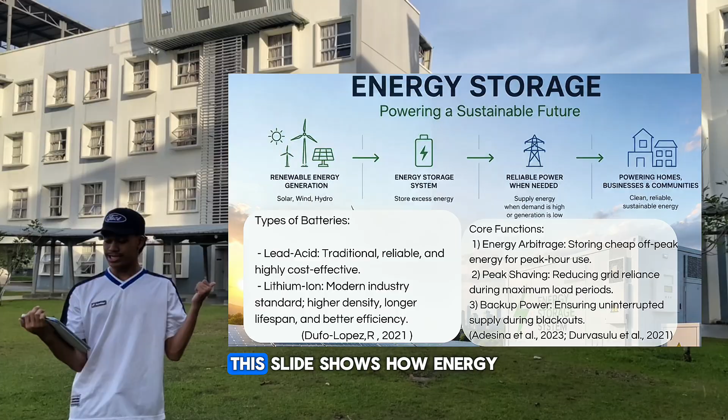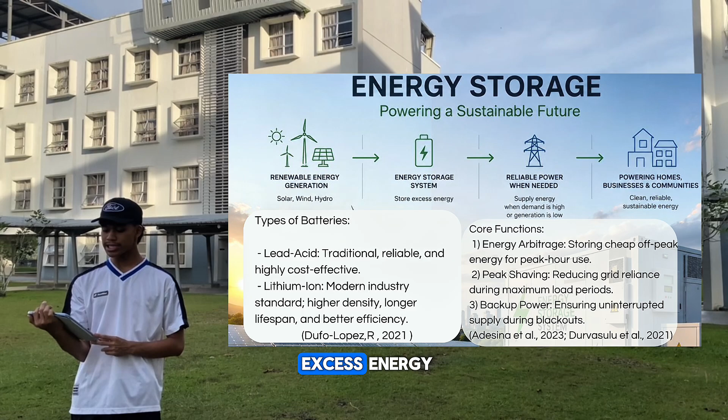Electricity is generated from renewable energy sources such as solar, wind, and hydropower. Since these energy sources depend on weather conditions, the amount of electricity produced can vary throughout the day. To solve this problem, an energy storage system is used to store excess energy when production is high. The stored energy can then be released when demand increases or when renewable energy generation is low. This ensures a reliable and continuous power supply for homes, businesses, and communities.

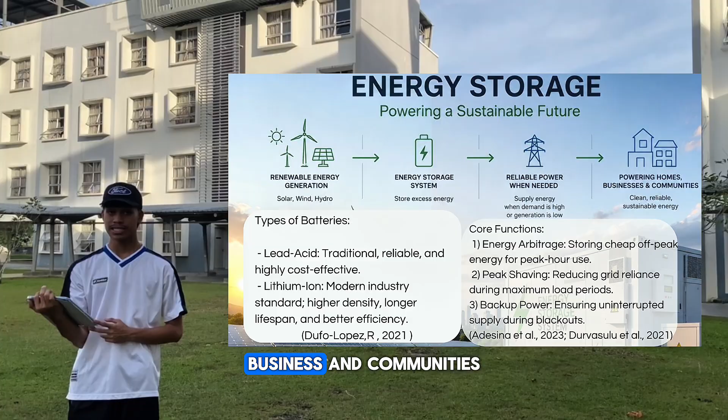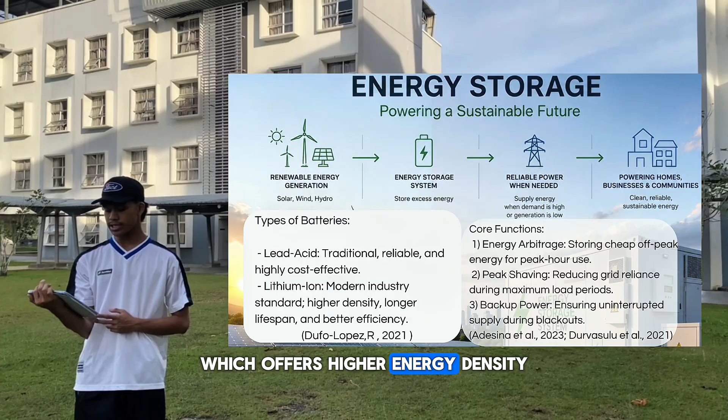There are two common types of batteries used in energy storage. The first is lead acid battery, which is reliable, widely used, and cost effective. The second is lithium ion battery, which offers higher energy density, better efficiency, and longer lifespan, making it the preferred choice in modern energy storage applications.

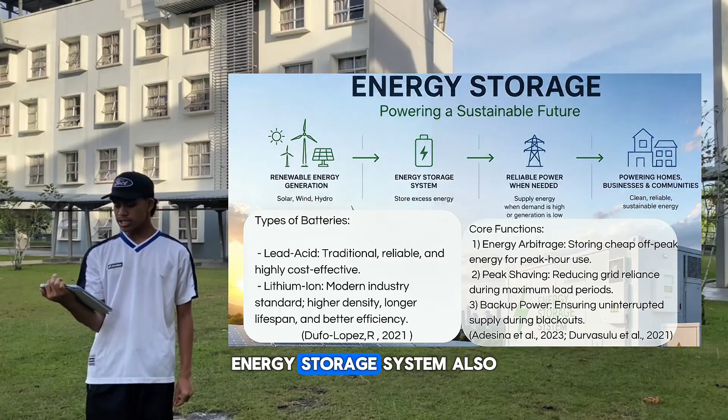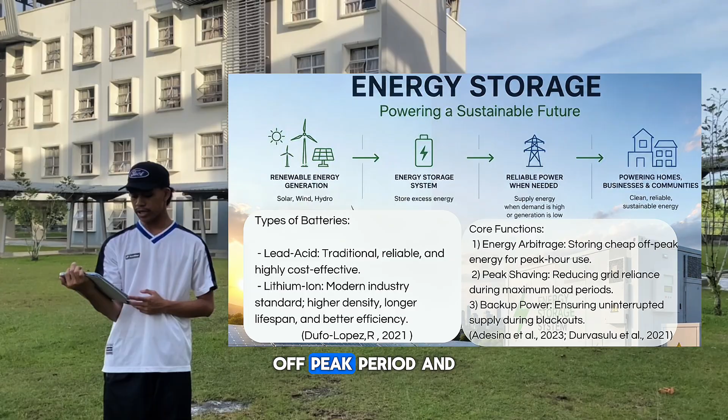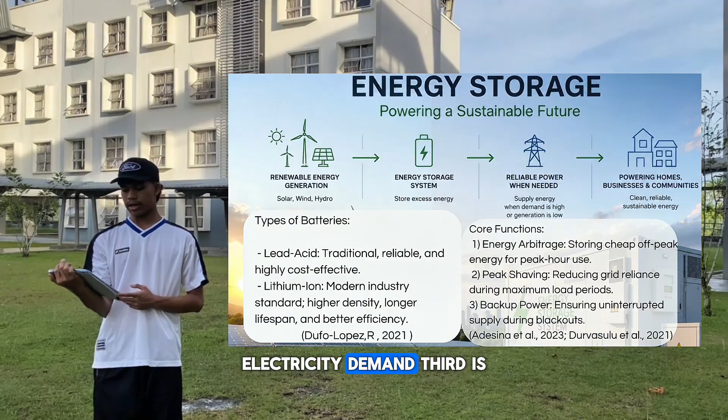Energy storage systems also have three main functions. The first is energy arbitrage, which involves storing energy during off-peak periods and using it during peak hours. Second is peak shaving, which reduces dependence on the power grid during periods of higher electricity demand. Third is backup power, which provides electricity during outages or blackouts.

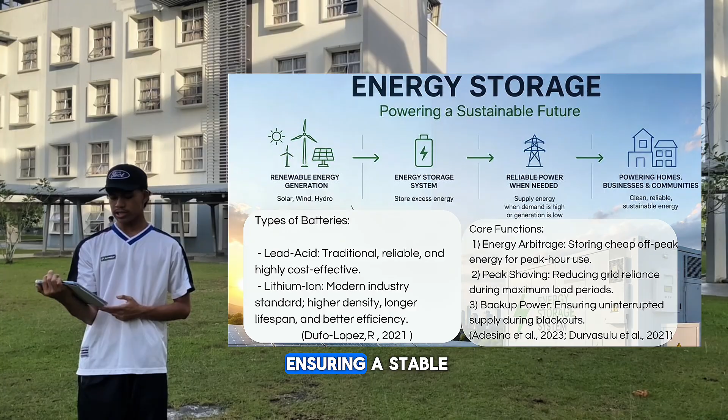Overall, energy storage systems play an important role in the reliability of renewable energy, reducing energy costs, and ensuring a stable and sustainable electricity supply for the future. So that's all from me.

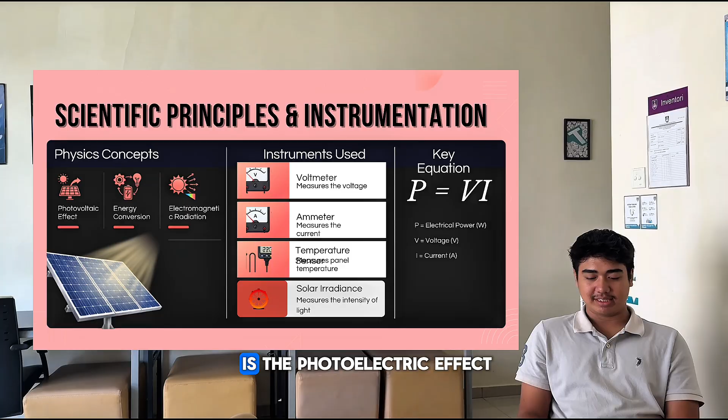Next, I will explain the scientific principles and instrumentation involved in the solar energy system. The first basic concept is the photovoltaic effect. Solar cells absorb sunlight and convert it directly into electrical energy.

When sunlight hits the solar panel, electrons gain energy and move, creating an electric current. The second concept is energy conversion, where solar energy is transformed into electrical energy that can be used to power electrical devices. The third concept is electromagnetic radiation: sunlight carries energy in the form of electromagnetic waves, and this energy is absorbed by the solar cells.

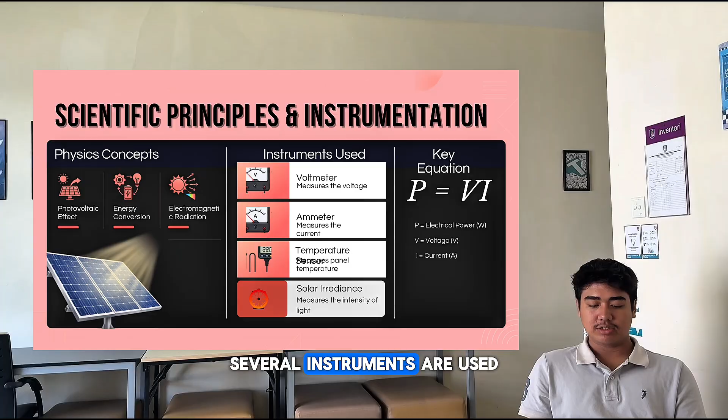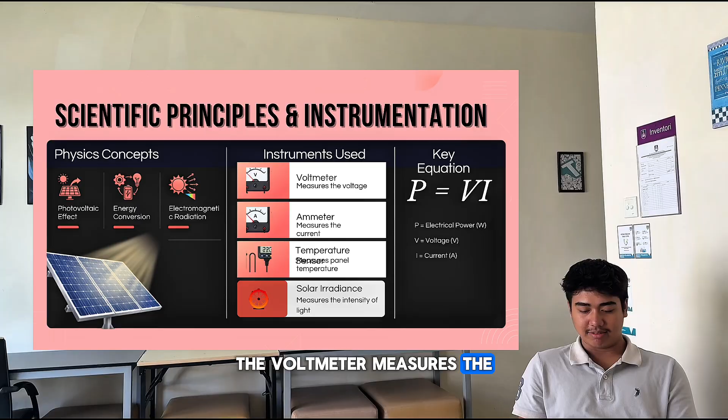Several instruments are used to monitor the system. A solar irradiance meter measures the intensity of sunlight. A voltmeter measures the voltage produced. An ammeter measures the current flowing in the circuit. And a temperature sensor measures the temperature of the solar panel.

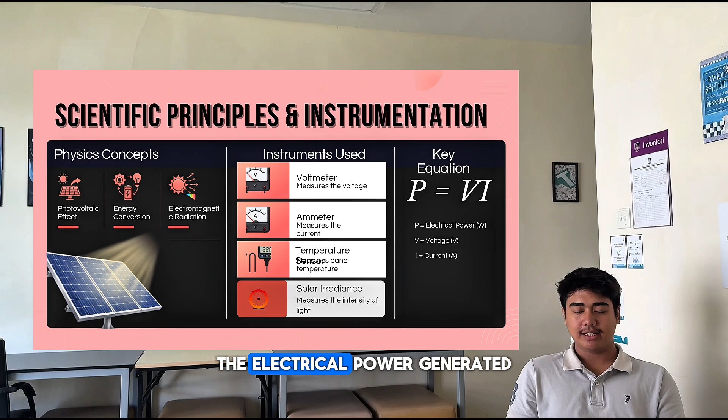The electrical power generated by the solar panel can be calculated using the equation P equals V times I, where P is power, V is voltage, and I is current.

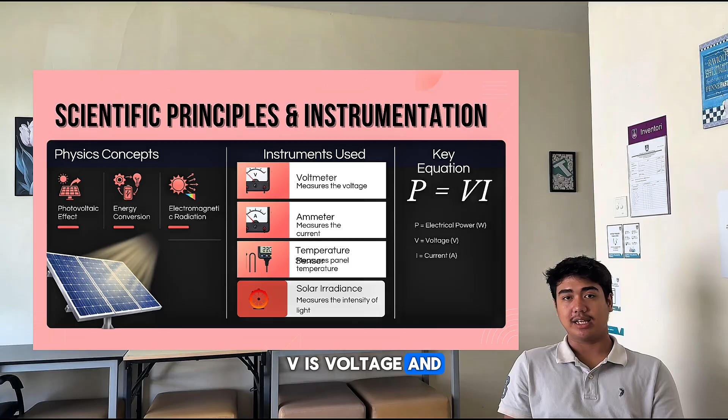Next, the solar energy system. This system consists of 5 main components, namely solar panel, battery charge controller, battery storage, inverter, and electrical load. The working principle begins when sunlight strikes the solar panel. Through the photovoltaic effect, the solar panel converts solar energy into electrical energy.

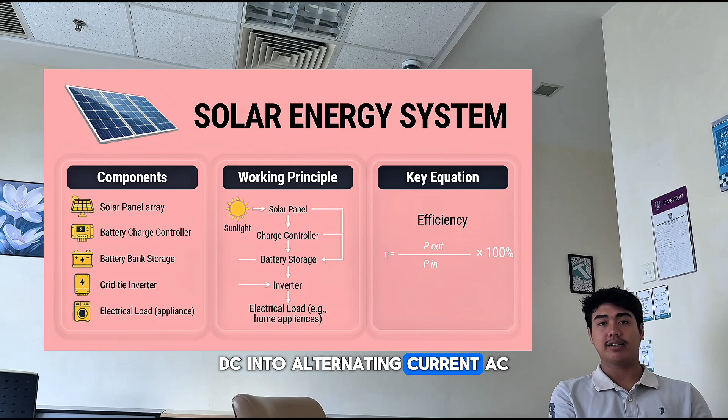The generated electricity then flows to the battery charge controller, which regulates the charging process and protects the battery from overcharging. Next, the electrical energy is stored in the battery for later use. The inverter then converts direct current (DC) into alternating current (AC), which can be used by electrical appliances, also known as the electrical load.

The efficiency of the solar panel can be determined using the equation shown on the slide, where eta represents efficiency, P out is the output power produced by the solar panel, and P in is the input power received from the sunlight.

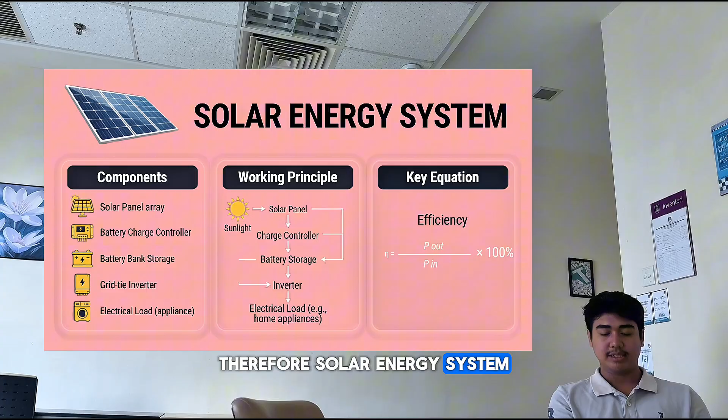A higher efficiency means the solar panel can convert more solar energy into useful electrical energy. Therefore, solar energy systems provide a clean, renewable, and sustainable source of electricity.

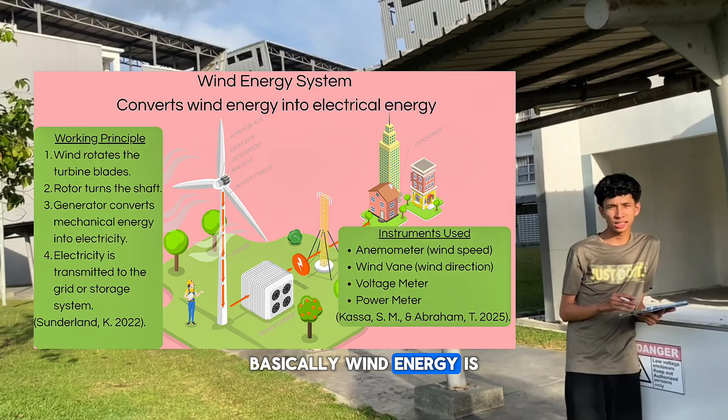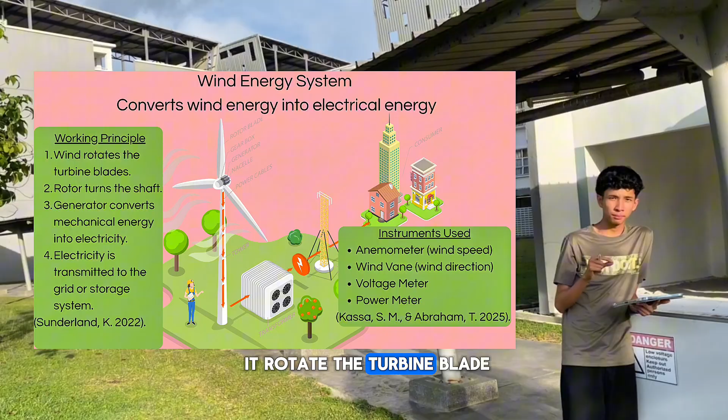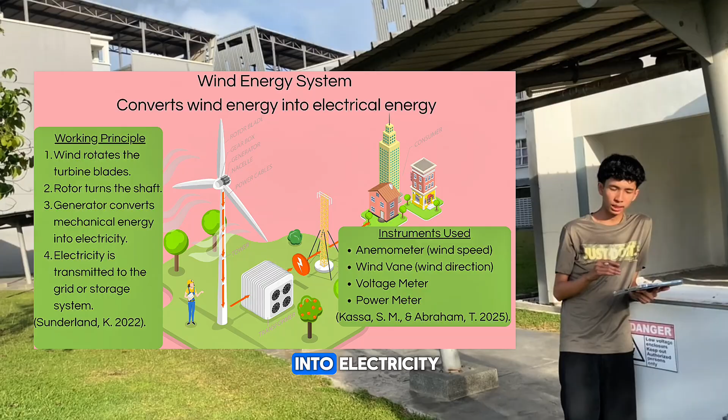Okay, now we'll talk about wind energy. Wind energy is a renewable source that converts the kinetic energy of moving air into electrical energy. When the wind blows, it rotates the turbine blades. The blades are connected to a rotor and shaft, which drive a generator. The generator then converts the mechanical energy into electricity through electromagnetic induction.

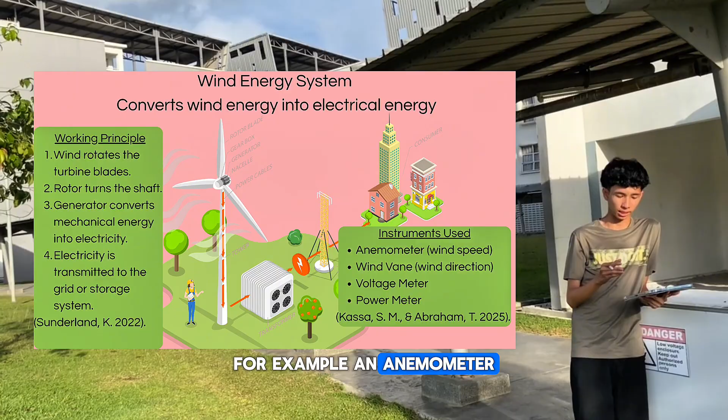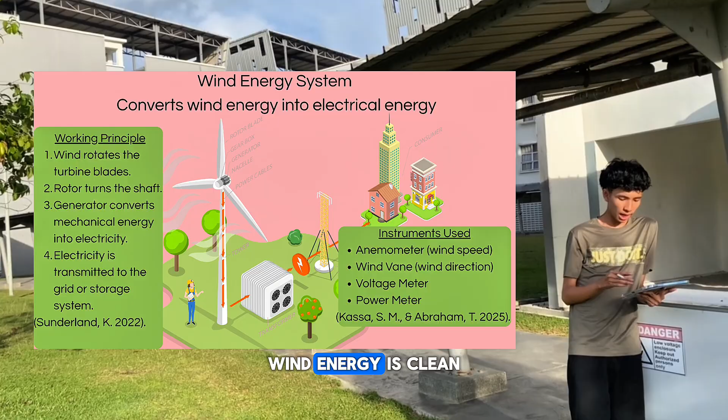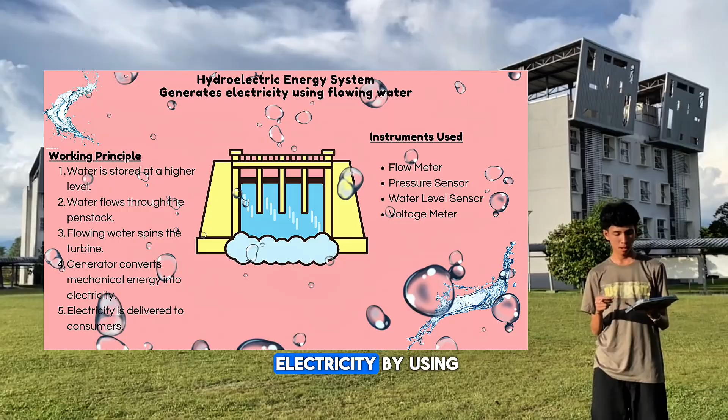Okay, now I will talk about how hydroelectric energy is made. Hydroelectric energy generates electricity by using the energy of flowing water. Water stored in a reservoir is released through a penstock, causing it to flow at high speed and spin the turbine. The turbine is connected to a generator which converts the mechanical energy into electrical energy.

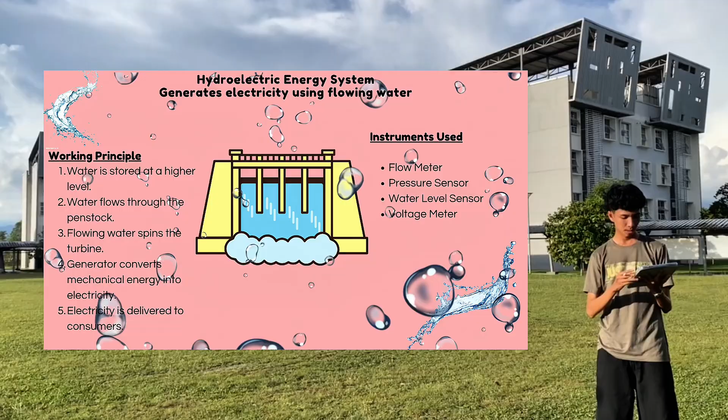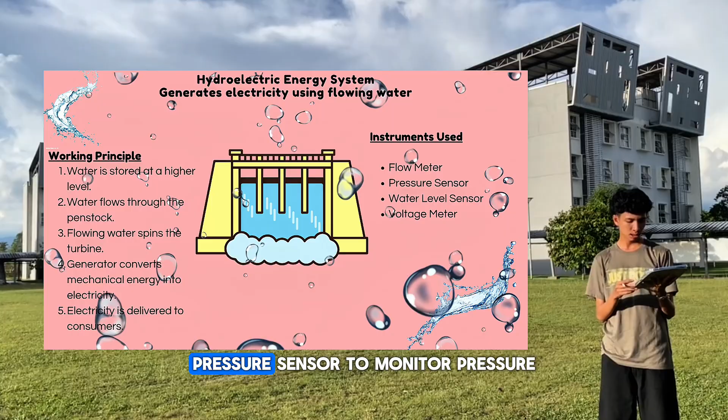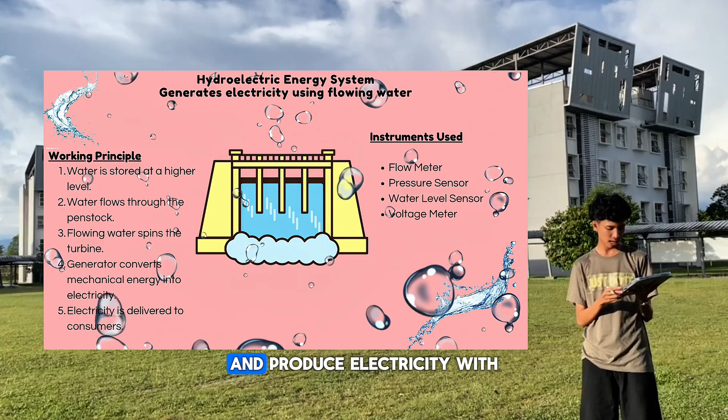To ensure efficient operation, several instruments are used, including a flow meter to measure water flow, a pressure sensor to monitor pressure, and a water level sensor to track the reservoir level. Hydroelectric power is highly efficient, reliable, and produces electricity with very low environmental impact.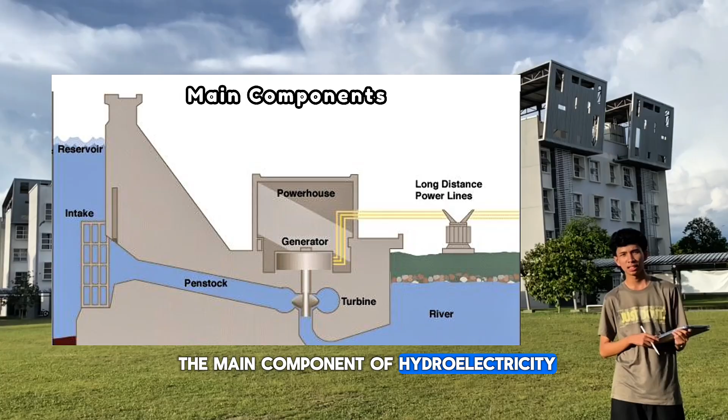In this slide, I will show you the main components of hydroelectric energy. As you can see, there is a powerhouse, generator, turbine, and penstock.

That's all from me. Okay, now I will explain some real-world applications of renewable energy in different countries. First, Germany. Germany uses large-scale solar farms to generate electricity. This solar farm can produce a very high amount of energy and supply power to many people. Germany also has a strong focus on renewable energy development, and they are one of the leading countries in using clean energy.

Next is China. China is the world's largest renewable energy producer. This means China produces more renewable energy compared to other countries. They have made major investments in solar and wind energy, building many large projects to support their energy needs.

Lastly, Malaysia. In Malaysia, there are large-scale solar, also known as LSS, projects which help generate electricity on a bigger scale. There is also the Net Energy Metering, or NEM, project, which allows people to install solar panels at home and reduce their electricity bill. This initiative supports the growing use of rooftop solar systems in Malaysia. This example shows how different countries are using renewable energy in real life to meet their energy demands.

Okay, now let's jump to the benefits of renewable energy. First, renewable energy is environment friendly. This is because it produces little to no pollution compared to fossil fuel, which helps protect the environment. Second, it helps reduce carbon emissions. Lower carbon emissions are important because they help slow down climate change and reduce global warming.

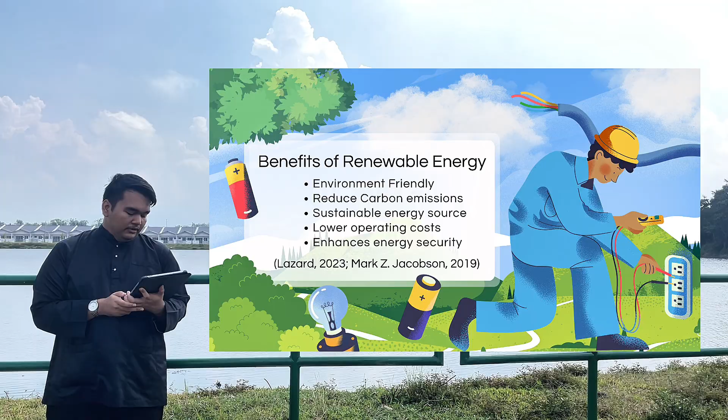Third, it is a sustainable energy source. This means renewable energy will not run out, as it comes from natural sources like sun, wind, and water. Fourth, it has lower operating costs. After installation, the cost to maintain and operate a renewable energy system is usually lower compared to traditional energy resources. Finally, it enhances energy security. Countries can produce their own energy, which reduces dependence on imported fuels and increases stability.

However, renewable energy also has some challenges. First, it has high initial investment cost. Setting up solar panels or wind turbines requires a large amount of money at the beginning. Second, it is weather dependent. For example, solar energy needs sunlight and wind energy depends on wind conditions. So, energy production may not always be consistent.

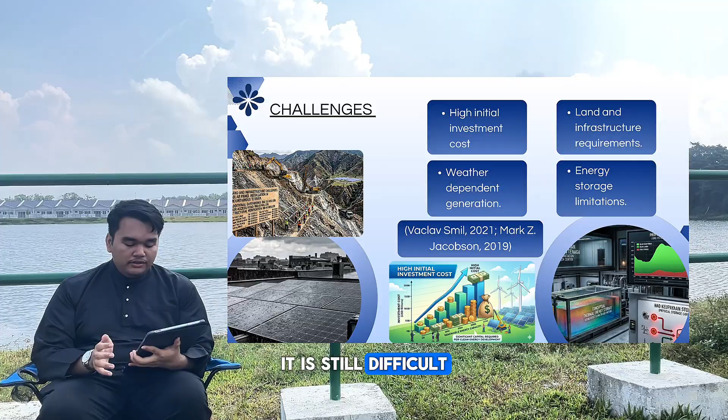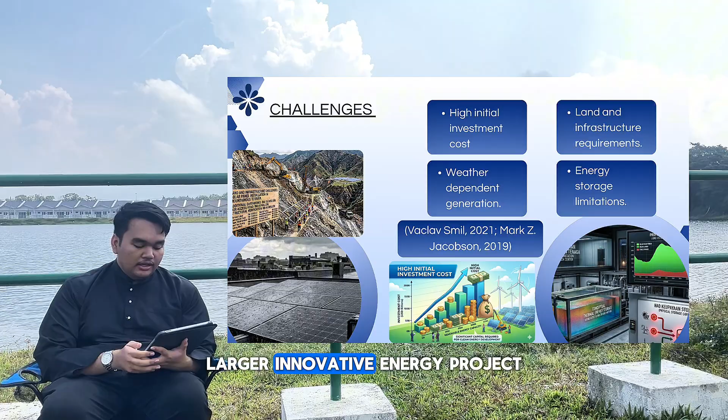Third, there are energy storage limitations. It is still difficult and expensive to store a large amount of energy for use when there is no sunlight or wind. Lastly, it requires land and infrastructure. Larger renewable energy projects need a lot of space and proper facilities, which can sometimes be difficult to develop.

Lastly, I will explain the future developments in renewable energy. First, smart grid technology. This technology helps manage and distribute electricity more efficiently, ensuring energy is used in a better way. Second, advanced energy storage systems. These systems are being improved to store energy more effectively so it can be used anytime when needed.

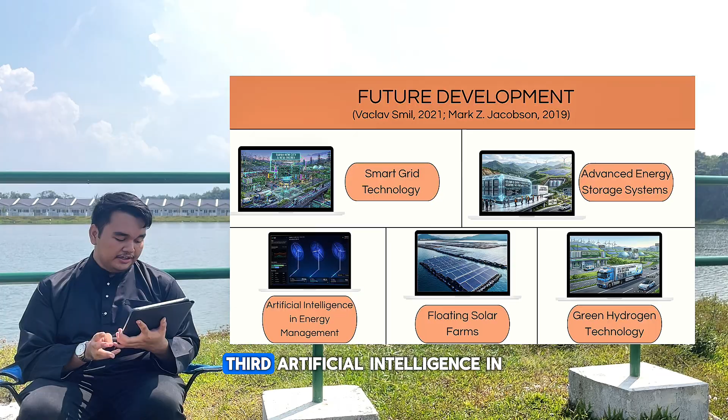Third, artificial intelligence in energy management. AI can help monitor and control energy usage, making the system more efficient and reducing waste. Fourth, floating solar farms. These solar panels can be placed on water surfaces, which helps save land space and improve efficiency.

Finally, green hydrogen technology. This is a clean fuel that can be produced using renewable energy, and it has great potential for future energy use. Overall, these developments will help make renewable energy more efficient, reliable, and widely used in the future.

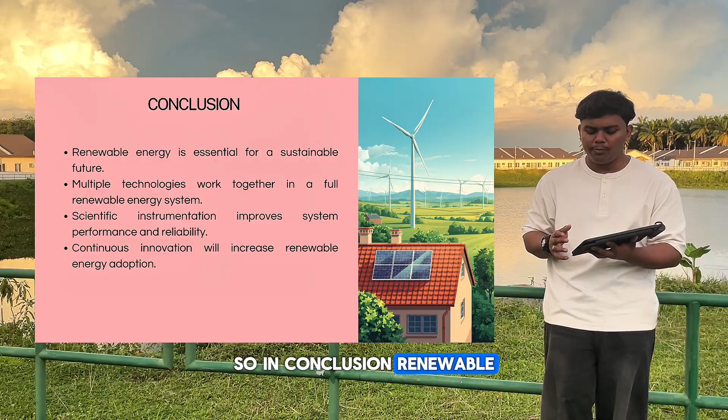So now we go to the final part, which is the conclusion. In conclusion, renewable energy is an essential solution for achieving a sustainable future. A full renewable energy system combines energy generation, storage, and distribution technology to provide a reliable electricity supply.

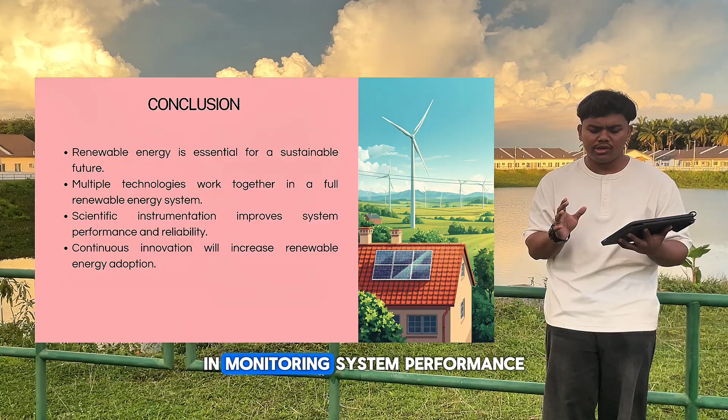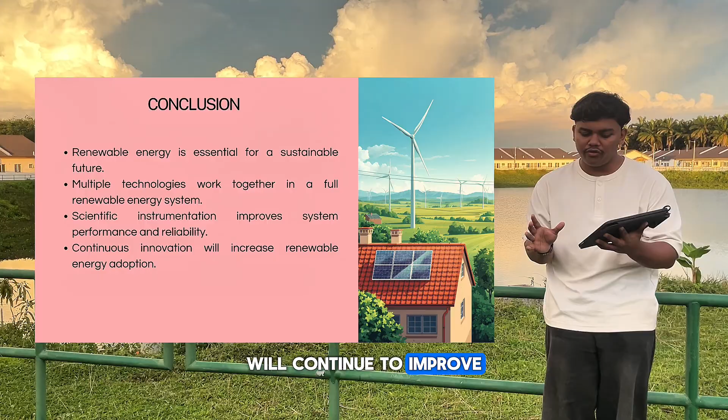Scientific instrumentation also plays an important role in monitoring system performance and improving efficiency. Although there are challenges such as high installation costs and weather dependency, future development and innovation will continue to improve renewable energy technologies. Therefore, renewable energy will play an increasingly important role in meeting future energy demand while protecting the environment. So, thank you for watching our presentation and for your attention.